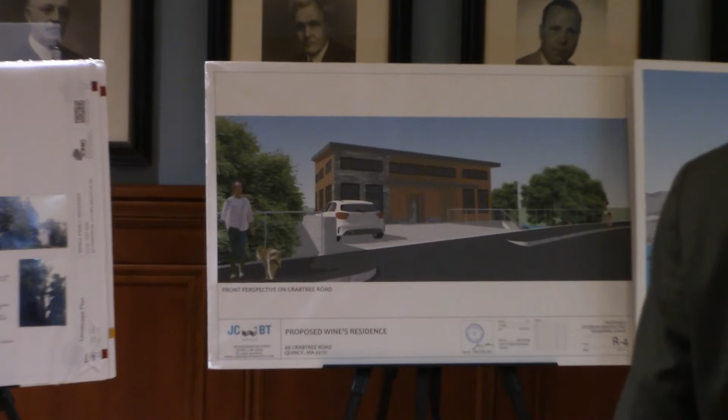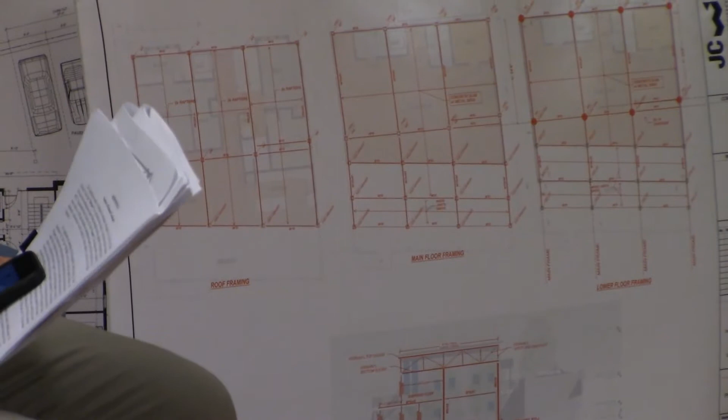His big emphasis was energy efficient, handicapped access, and sad as it may seem, to create a home, if he had to spend his final days, that's where they'd be. So he couldn't emphasize more how he wanted to create a beautiful environment from a landscape point of view. So as a result of that, we did a lot of research with the city of Quincy. They were fantastic. We talked with Conservation Commission agents, we talked with the building commissioners, and Steve DeRoche did his work as far as the survey goes, and we wanted to create a 7,308 square foot lot, seeking zoning relief.

The real reason is Mrs. Wine in the primary structure has an enclosed pool, and to modify that pool, it just couldn't be done. She needs it for therapeutic and health reasons. So that would have given us the 500 square feet, but we thought we'd go the route of looking for the 7,300 square foot lot. In addition, we're seeking a special permit. We also have a permit application running concurrent with the Conservation Commission, as well as our submissions in regard to the tree ordinance.

Due to the topography and the location of the land, we have a velocity zone in the front of the lot by the water, so we can't build in elevation 16 or less, and that's why we're going to put the structure up where it is on these proposals. Now, the big thing was, it was encouraged that we had a neighborhood meeting, so I will submit it, but Mr. Wine went around with approximately 100 packets to the Squantum neighborhood with my number, his number. We heard from some neighbors, but also we conducted a neighborhood meeting at the Kennedy Center with Councilor Bill Harris. Councilor Bill Harris basically said, we're gonna leave it up to the subject matter experts, zoning and conservation, and he conducted the meeting.

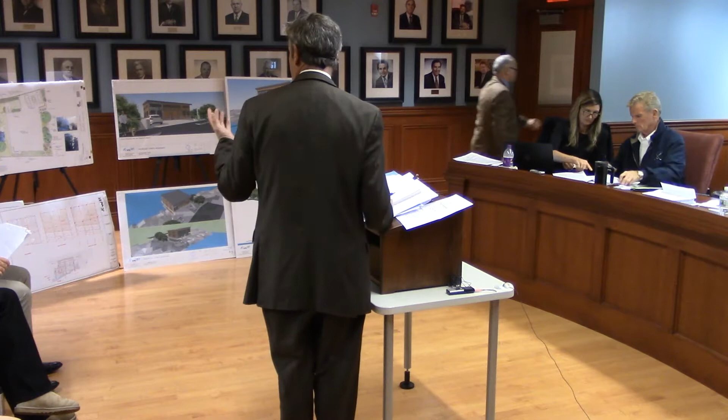I just want to emphasize, this is not a speculative venture. It's for a 40-year resident trying to do some health planning who doesn't want to move, wants to stay in Squantum. So we ask the board for any consideration of our request. I'm sure people will speak tonight. I'll bring in our team. They'll announce their names. And at the end, if you have any questions, I'll gladly do a wrap-up. Thank you for your time.

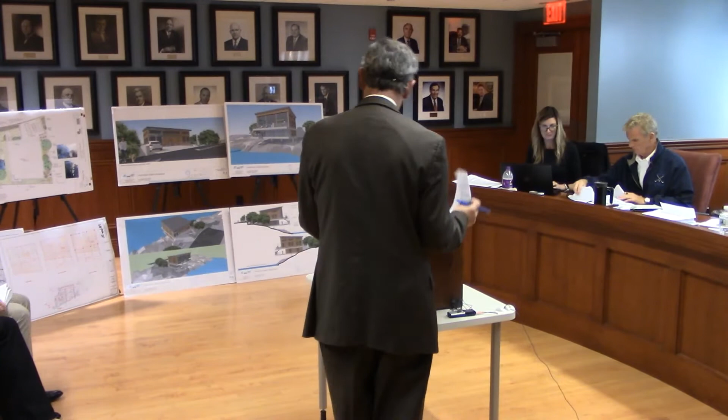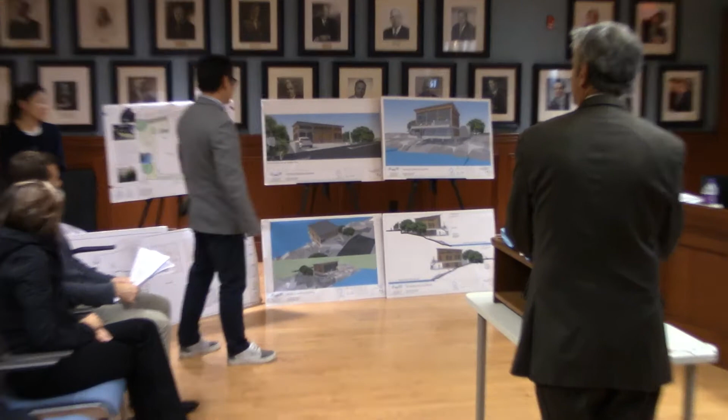Good evening, Mr. Chairman, members of the board. My name is Jim Chen, the architect, representing Mr. Wine, the homeowner. Address? 585 Washington Street in Quincy. Thanks. So we tried our best to interpret Mr. Wine's vision of this house.

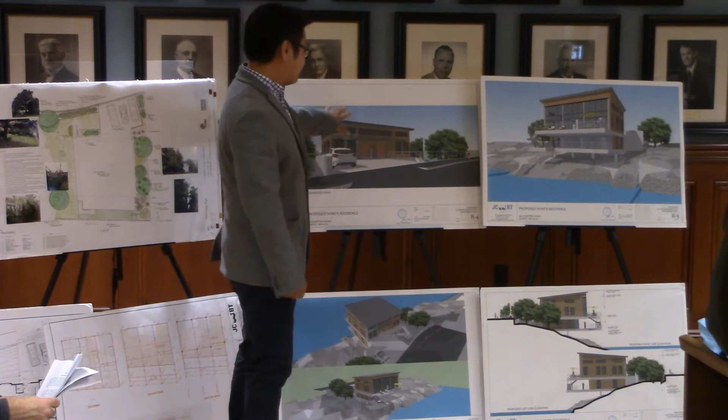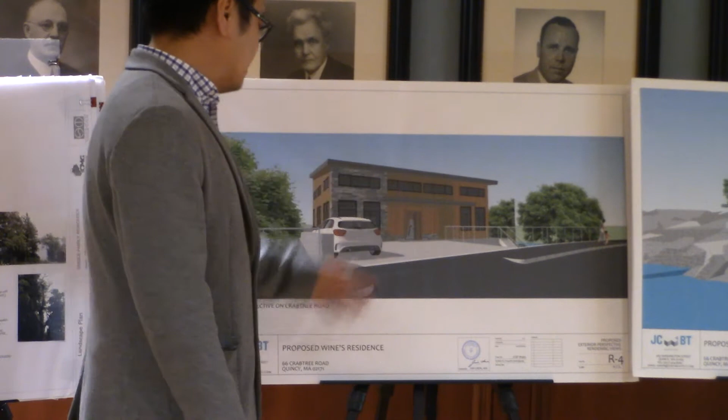So our goal is to come up with a contemporary home. The majority of the facade has changed, where we use different types of materials to differentiate some of the insets and bump-outs. At the entrance, we have a 3-foot overhang canopy right over the entrance. The use of different types of windows really elaborates that sense of contemporariness.

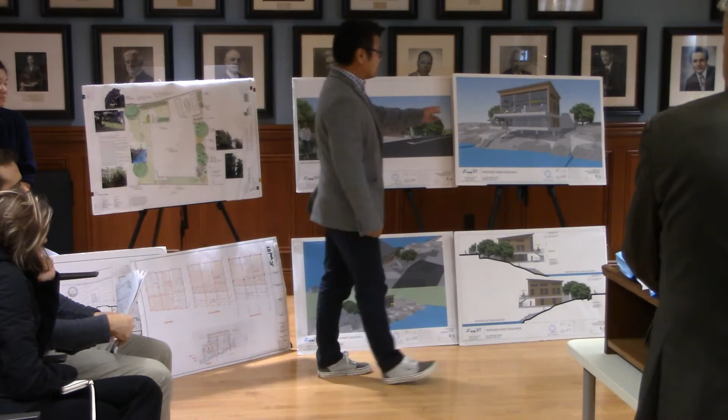And the exterior material on this facade is stone veneer, and on the surrounding we use wood planks, either in vertical or horizontal patterns. At the rear, facing the water, Mr. Wine's vision is to have this view really open up to the water. So the lower level and the top level is all glass, structural glass.

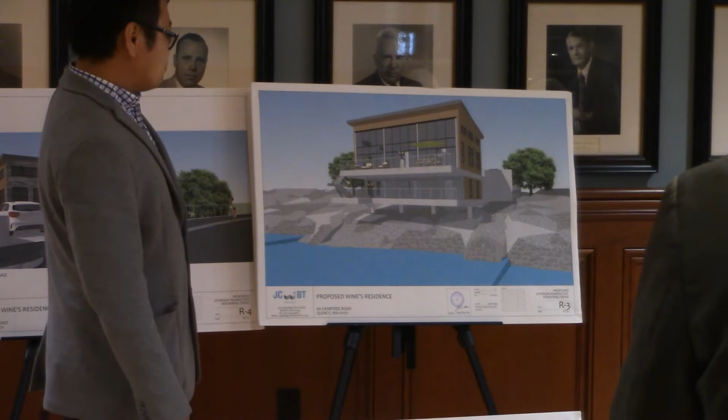And the main level is where Mr. Wine will spend most of his time. The ceiling height is about 16 feet tall. His vision was to have a mezzanine level in that space here. Is there going to be, or there is? There will be a mezzanine level, because that space is 16 feet, so there's room for that.

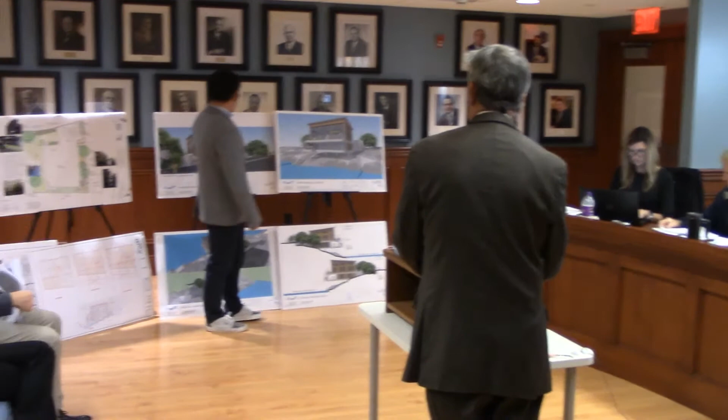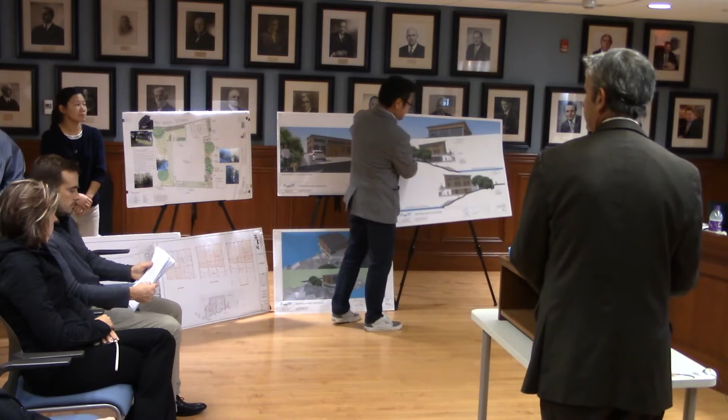And we also changed the roof of this building to slope upward, facing the water, to enhance that view to the water. Excuse me, speak up, please. What are you using, HardiePlank on the side? Wood planks.

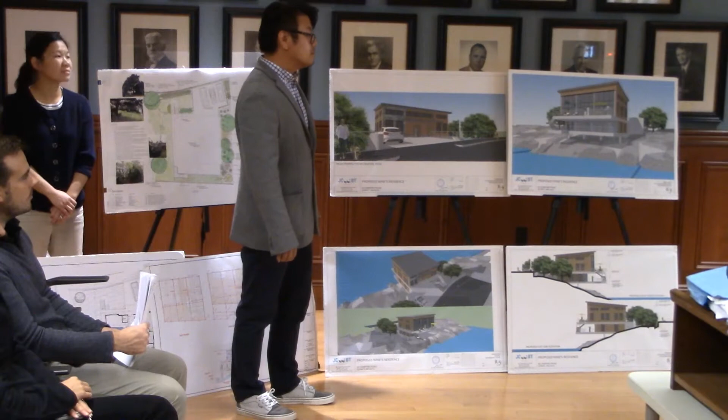16 feet, the mezzanine with the front glass. And what's the main level? Is that level going to be all wood there, or is that cement? The floor will be cantilevered with steel and some concrete slabs.

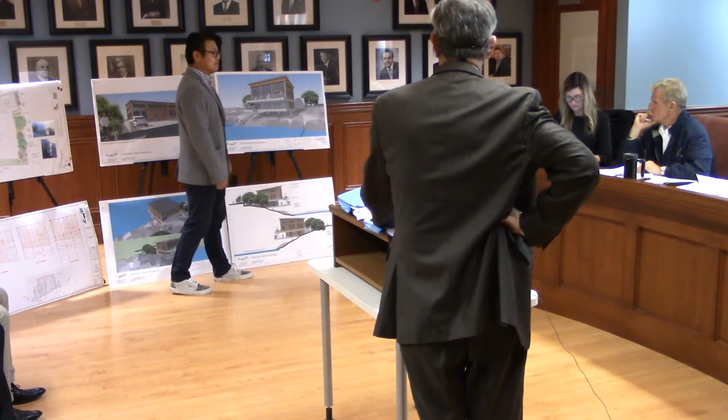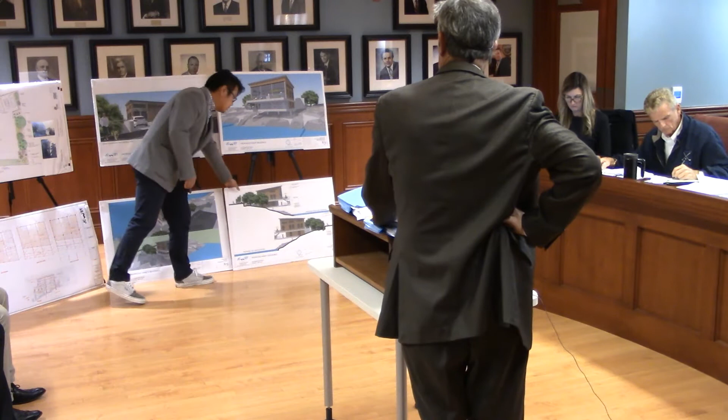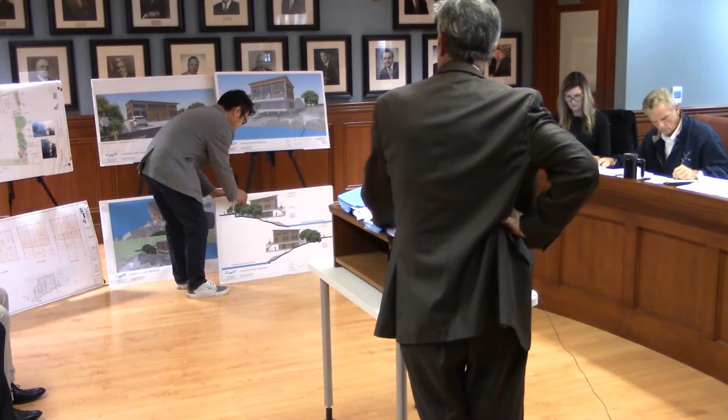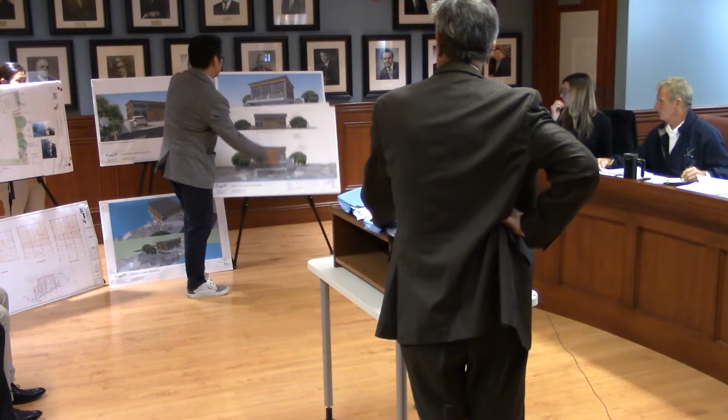Any questions? How tall is the structure? The height of the structure from the average grade point is 30 feet. But from street level, what will it look like? From street level, it'll be much lower, 16 feet to the top. So in other words, 16 feet here, but then it slopes out to about 19, 20. Thank you.

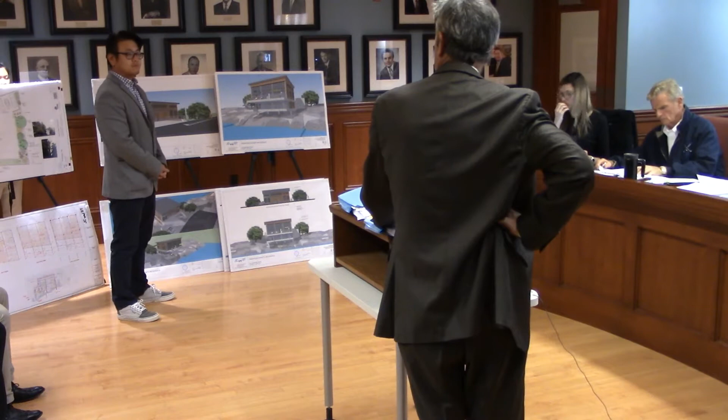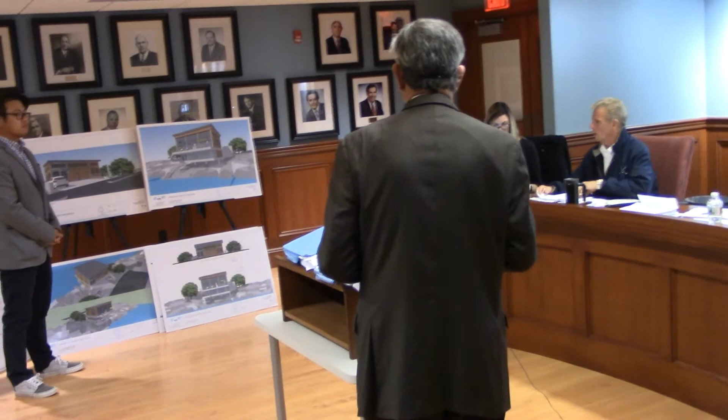Anything? What type of wood? Using mahogany or redwood? Probably redwood. Thank you. How many bedrooms are going to be in there? 3 bedrooms. How many bathrooms? 2 bathrooms. Thanks. Anything else? Thank you.

Counsel, what's the side setback? It's all setbacks according to the City of Quincy. There's 13, okay, I was just seeing. We met all the setbacks. The only exception we're looking for is the 7,000. And the setbacks are maintained in the existing house on the new lot created.

Because I can't see it, the plan doesn't give me the dimensions where the cut down the middle is. See, we're creating the side setback. Yes, correct. I couldn't tell from the plan. I'm looking at the rear setback. What's the rear setback? I don't know how far it goes.

High tide, low tide? You still have to maintain it. I don't know where he owns the property. Most of those coastal properties go out. From the top of the wall, I believe it's 20. Steve, the surveyor, can you step forward to address the setbacks, please? Mr. Aikens has a question on the rear setback from the ocean. 20 feet, Mr. Aikens, to the house. Thank you.

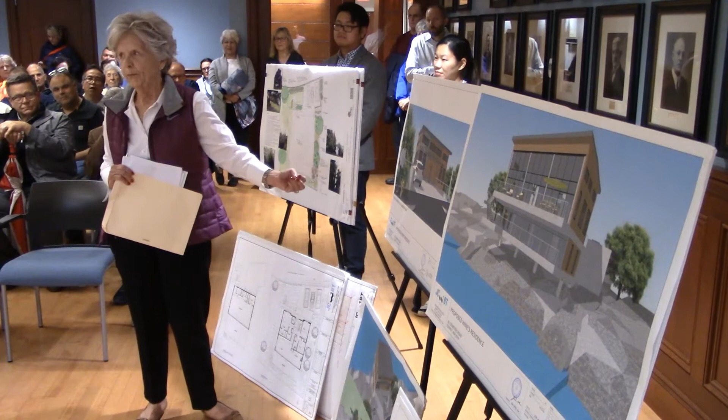Our first drawings, they called them junk. This is as good as we're gonna get with our drawings. I think they're nice. But my whole purpose is the car, to the house, to the kitchen counter. So if you could approve this, I'd appreciate it. Thank you for your time. Thank you, Ms. Harris. Anyone else? Second call?

Thank you. I'm the owner of the property. I've lived next door since 1966, on 6 Nut Island Avenue, and when this house came available, I purchased it in 1976, so I've been there 44 years.

And I even have letters from her doctor saying that she should not be climbing stairs, if you want me to submit those. I have letters from my wife. It's strange, I don't live there with my wife. I've been separated for almost 35 years. I live with my partner, Joan. She and I have been there about 25 years. It's all compatible, but recently my wife went into the Milton Hospital this summer with 5 days in intensive care.

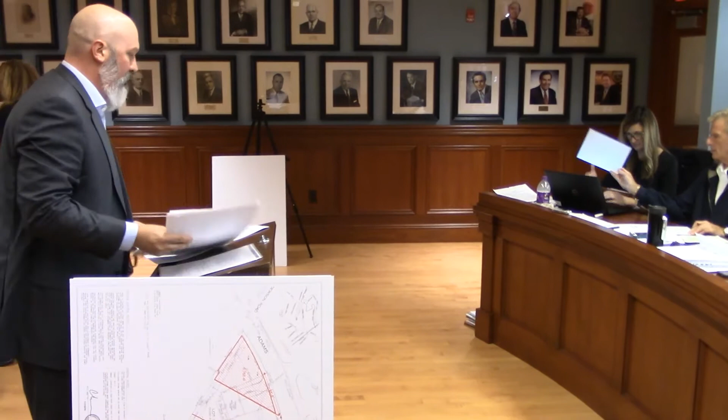Further on to tonight's agenda, new business, C-1972, Jeffrey Zinda, for an appeal on the issuance of a building permit for the premises number 184-200 Adams Street. Applicant or representative there, name and address for the record. Jeffrey Zinda, 18 Sturgill Road. You have the floor. Well, thank you, members of the board, for hearing me this evening. I have some information we can pass around here.

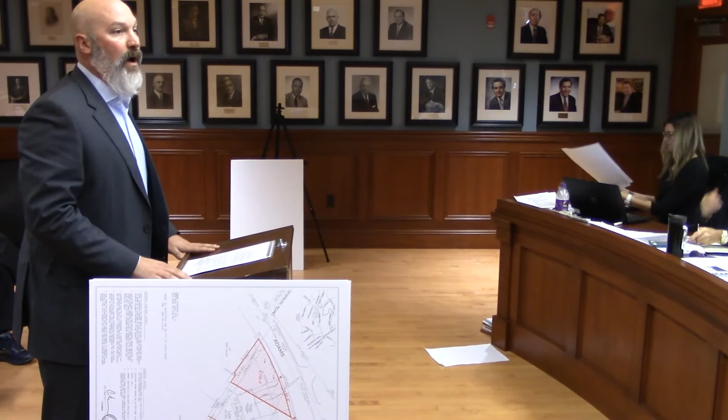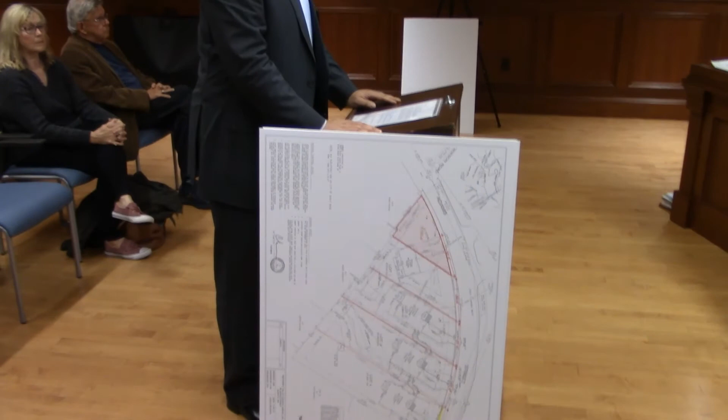I am a direct abutter to the site 184-200 Adams Street that is being redeveloped from a single-family lot into 4 single-family homes. And I believe there's been a significant oversight in reviewing the plans in that an approval not required designation was granted to these job sites, and construction is ongoing.

And because of 4 significant issues, first being dimensional insufficiency, second being issues of public safety, third being the City of Quincy tree ordinance, and fourth being some zoning violations I'll get into, I would request that the construction on this site be stopped and that the permits be repealed until further investigation of these issues can occur.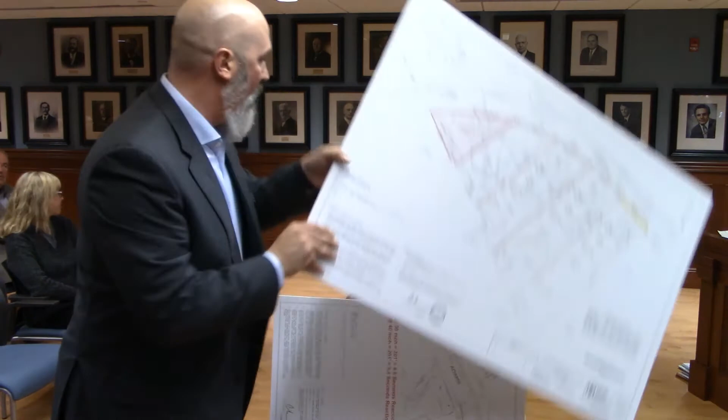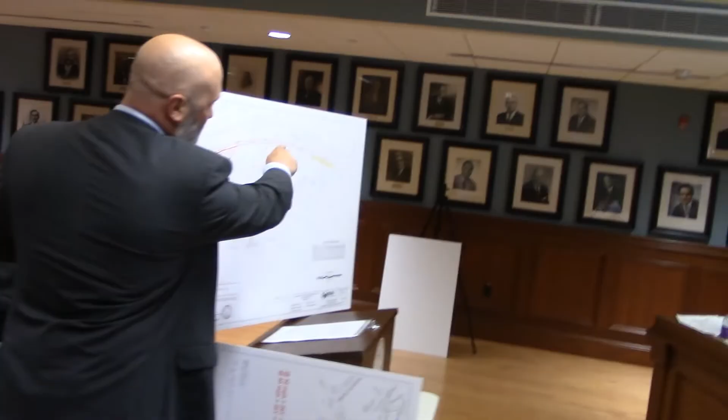The first issue, and this is what I've just distributed to all of you, is around a significant issue at the northeast corner of the site. As you well know, in Table 411, the dimensional requirements of the City of Quincy for Residential A, we need 85 feet of frontage for a project site. At this particular point here, about 80 feet in of Lot 4 from the eastern lot line, there is a wall that departs the property of 184-200 Adams Street and is actually on city property. I would say that does not provide adequate frontage for the first lot here being Lot 4.

So as we start to back out 85 feet from the eastern edge towards the west here, we see very quickly that you can get 3 additional building sites on here within the dimensional requirements. However, the 4th building site here can get 85 feet of frontage, but now runs out of space by nearly 1,000 square feet to meet the nearly 7,600 square foot minimum lot size requirement, if you design it like you developed. This is just one way of doing it, and obviously I'm not the surveyor or civil engineer for this project.

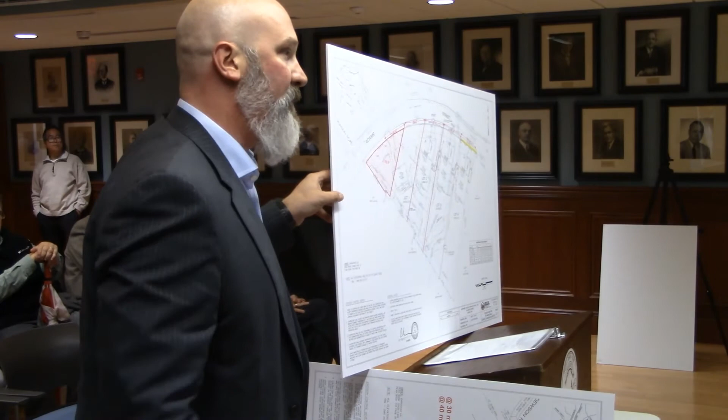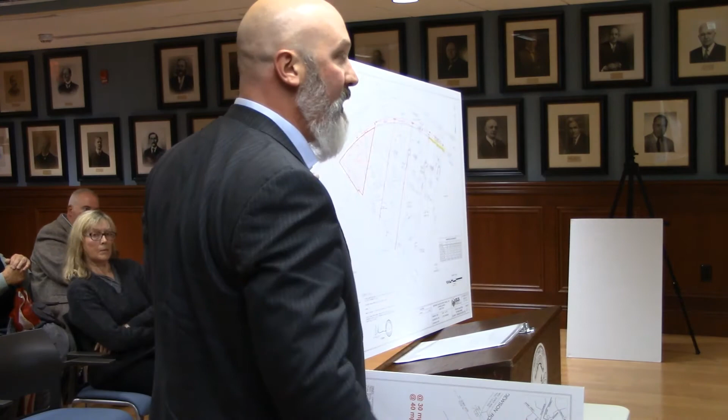However, I do believe in order to get the curb cuts required to get access to all of these sites, you will have to traverse city land, and a special variance will be required to do that. To the best of my knowledge, that has not been filed for, and because of that, I make the argument this is not as-of-right construction, because this site does not have access to the public right of way.

Let me ask a question, I'm already confused. Yeah. Okay? Where's the city property? So the section in the diagram is highlighted in yellow here. I'm sorry, I don't have an easel. Maybe I'll just borrow this one here. So the section over here,

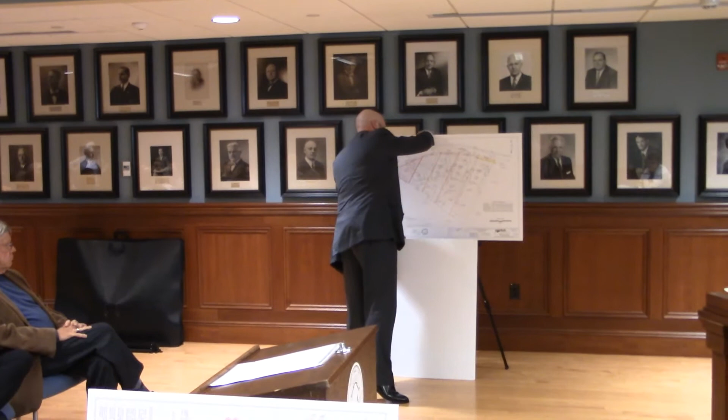So this section here of approximately 80 feet in from the eastern edge. This is where this lot line departs at approximately 3 degrees over. And this area in highlight is an existing wall that technically the city owns. Thank you. How does the city own it? It's on city property. On a road? It is on city property. This is the existing lot line for site 4 here. And this area, this wall, granite wall, varies in height across the frontage, is on city property.

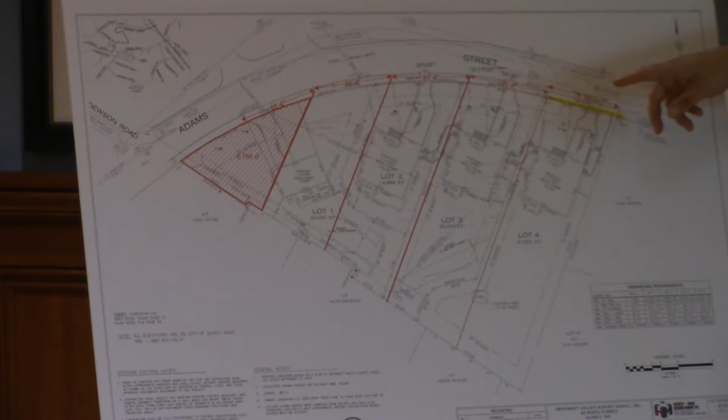I have looked into this and I cannot prove this, but I believe the entire wall was constructed at one point in time by the City of Quincy. It's of similar vintage to the historic wall on the opposite side of the street, which brings in other issues. It is not part of the historic district. The historic district actually ends over here. However, I do believe it is of historic significance.

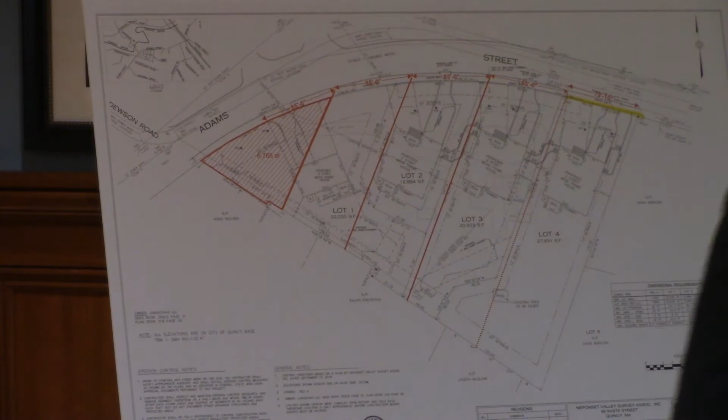The second issue related to the wall that I believe is of great importance to the neighborhood here is the fact that that wall has significant height. Along the north side here, it varies in height from east to west, but there's almost 7'6" of wall at the center portion here.

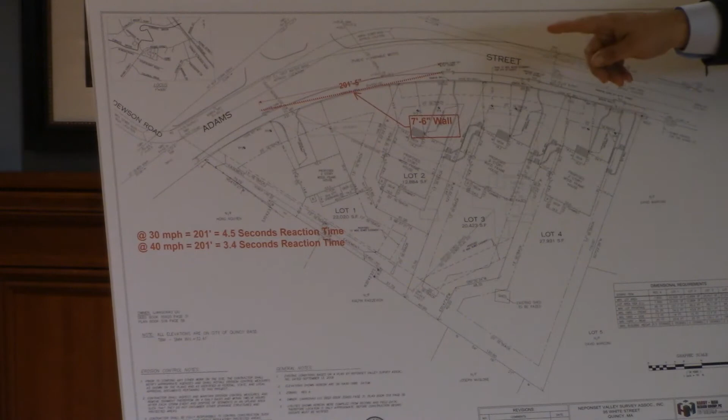That obscures the view when moving from west to east down Adams Street. You cannot see this first requested curb cut until you're almost 200 feet close to where a vehicle could be exiting here. At 30 miles an hour, that gives you about 4.5 seconds to react if you're traveling at the speed limit. Most of you have probably been down Adams Street. I don't know very many people who actually travel the speed limit down Adams Street. At 40 miles an hour, you have about 3.4 seconds to react.

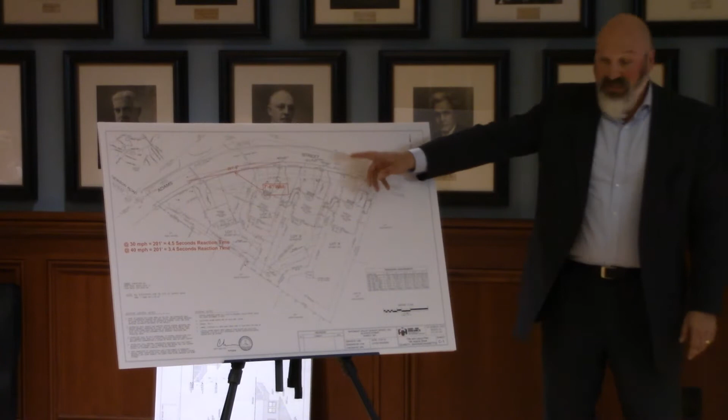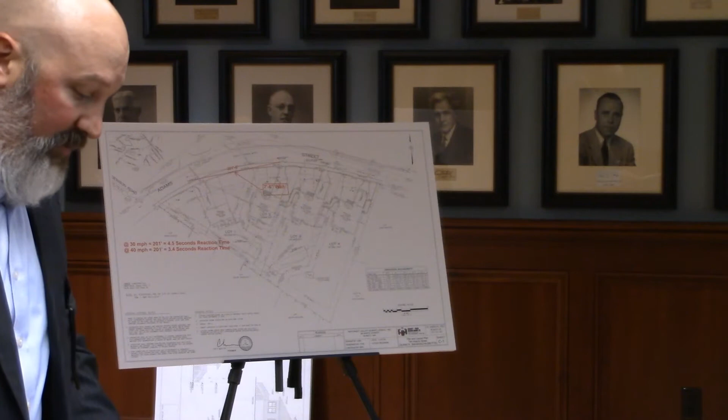I think this is a significant public safety issue, and I would ask that a traffic study be done to see if these curb cuts pose a risk or not. Furthermore, as part of the ongoing development, a number of quote-unquote significant trees were removed from the site, those being trees with a caliper of more than 8 inches, as you well know. There was a failure to submit a tree study to the city arborist as required by section 18.20.040 prior to the commencement of any work on site.

There's also violation of the tree protection procedures in section 18.20.070, prohibited activities within critical root zones. So as you can see here, there's significant material on site that is put within the critical root zone around many existing trees, the ones they did not remove from site. Furthermore, any grade changes would have to be part of a tree study around those existing trees as well.

I have observed also that the proposed utility plan to tap into the sanitary sewer system will require further removal of old growth trees along my property line, along the north side of my site, to tie into that existing infrastructure. And again, to the best of my knowledge, no special permit or study has been submitted to the city as required.

Furthermore, the last point I really want to focus in on today is the zoning violation around section 6.2.1. And I'll read it to you where it says, no soil, loam, sand, gravel, or stone shall be removed from any lot not in public use in the city without first obtaining a special permit from the Board of Appeals, except as exempted herein. And again, to the best of my knowledge, no permit has been filed for. Significant amounts of material are being removed week after week from this job site, as I observed.

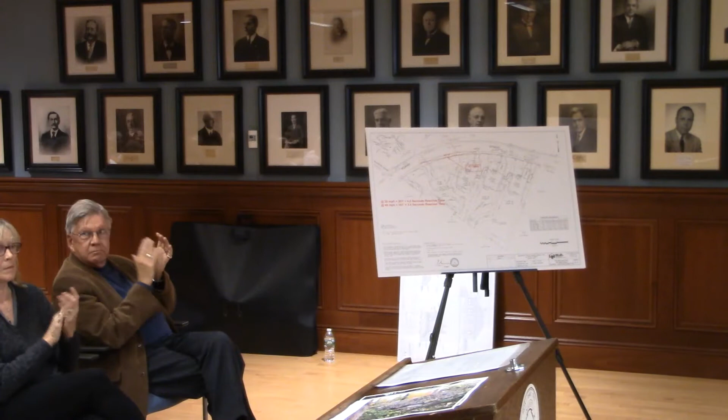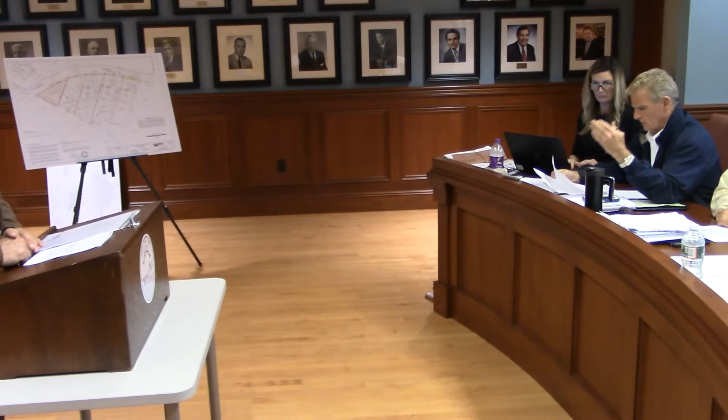Mr. Duca, could you tell us what's going on down there? Good evening, members of the board, Jay Duca for the record, Director of Inspection Services. Address? 55 C Street. Thank you. What I see here, through the drawing that you have in your file, it says it meets all. And I know what he drew here, the redraw, with a stone wall up there. Maybe you can explain why they got the permit with this drawing, because this drawing is a little different.

Sure, thank you, Mr. Chairman. I can tell you that the engineering department has approved these drawings. The wall is not clear who owns it and whose property it's on. The original plan called for 4 individual driveways. The applicant has agreed at his own expense to provide a private access way behind the wall on private property so that the driveways would not have to be built and the wall could remain intact. In addition to that, the canopies and the trees that overhang Adams Street would also remain intact.

There is a substantial landscaping plan that's on file with this. Dave Murphy, the Director of Parks and Recreation, has been looking at the plan. It's going to be a combination of what he's replanting on the site, which is substantial, and he will be having to put some money into the tree fund. So that's being worked out as we speak.

The section that he's talking about, earth removal 6.2, at the end of that section, 6.2.5, paragraph 3, is an exemption that you can take as much earth removal as long as it's in connection with a lawfully issued building permit. So they didn't get to the part where they show all the exemptions to that section.

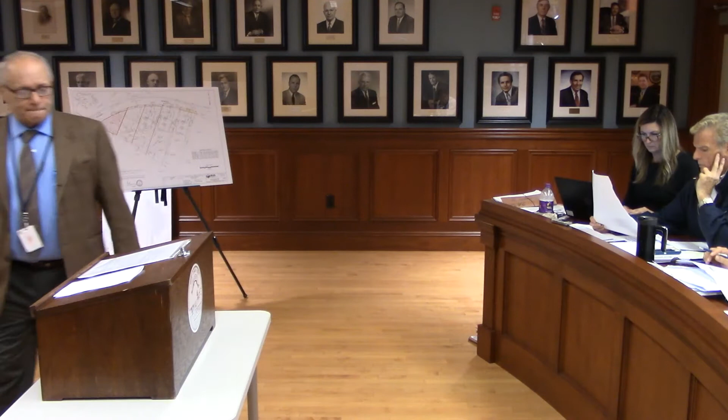Mr. Duca, where is that little road going again? So the road is going to be set back about 10 feet. And it's going to be a drive, and it's going to be substantial landscaping. In several places, there'll be a wooden, historically appropriate guardrail at a couple of points. Because the wall is very low on this side, and it's kind of high on this side, so that's why they don't want to disturb this part of it. So in a couple of turns, there's a couple of wood guardrails, along with shrubbery and landscaping.

Any other questions? I have one question. Mr. Duca, is there a city layout for Adams Street in that area? A filed city layout when they built the road? All I have before me is 4 plot plans and a subdivision plan. I don't know, maybe I don't understand. The contention on the walls, and I have some history building walls for roads.

Yep. And the contention on that is that if the wall holds back the property from the road, the property owner owns the wall. If the wall holds back the road from the property, the city owns the wall. Okay? If there's a public layout of that, that would show you the width of the highway in that road. So I don't know if there's a public layout. There is not. And we did look for that. I looked at that with Solicitor Timmons, and we couldn't really determine who owns the wall, but it appears that the wall is on private land. Maybe built by the city. Right. And generally, that's what they did.